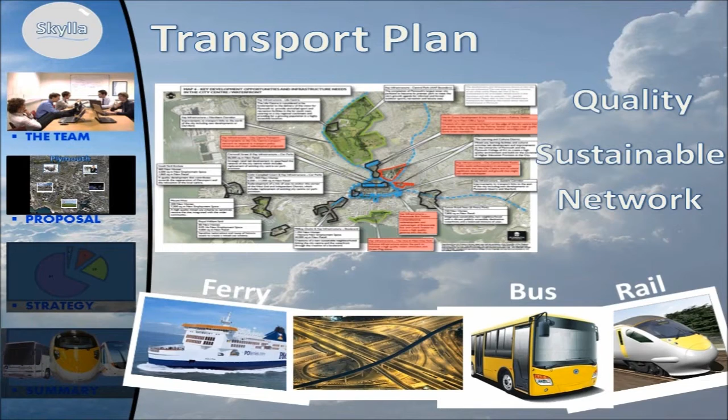The famous naval city of Plymouth, England, has a clear vision to be one of Europe's finest, most vibrant waterfront cities. Plymouth seeks to develop the city as a thriving centre for growth with investment in quality new homes, jobs and infrastructure, with the aim of becoming the regional economic hub of the South West. Plymouth's third local transport plan provides a key framework linking the delivery of a high-quality, sustainable transport network with long-term socio-economic growth for the city, and highlights that improvements to the major gateways of the city, bus, ferry, rail and road, are central to the delivery of the plan's core strategy.

The city railway station marks the end of the Armada Way pedestrian route linking the railway station with the Hoe, and represents a key landing area for tourists and businesses visiting the city, and yet, in its current form, fails to meet the requirements of a modern, attractive city railway station.

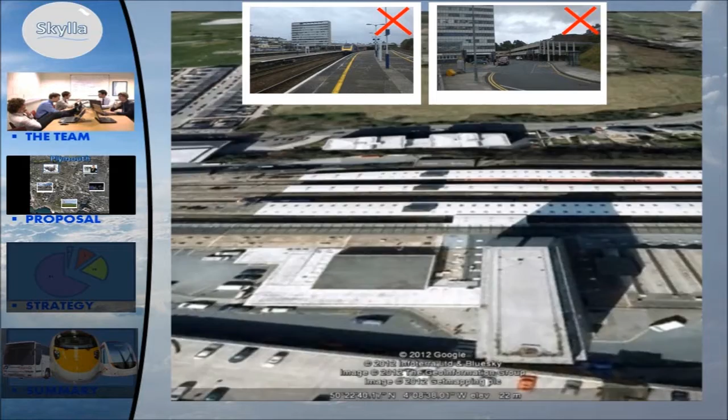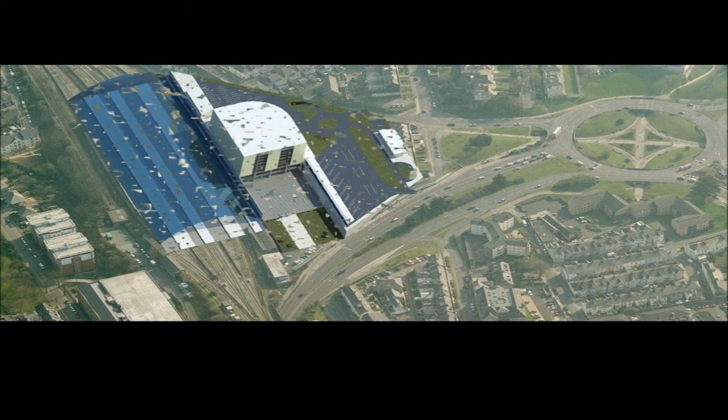In response to these needs for development, SKYLLA has established a truly sustainable solution in the form of a transport hub. The transport hub has sought to fulfil this sustainability agenda through environmental aspects, fulfilling the requirements of BREEAM Excellent standard in line with the Plymouth Climate Change Action Plan, social aspects, delivering growth, raising aspirations, reducing inequality and providing value for communities, and economic aspects, creating business opportunity to kickstart wider growth through inner city regeneration.

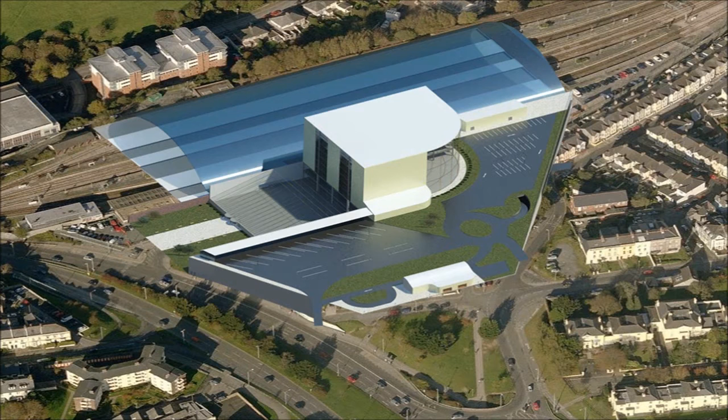To fulfil these desired outcomes, the transport hub will require a complete redevelopment of the current railway station site in order to use the land most effectively. The hub will not only improve the existing services offered, but will also integrate additional modes of transport, including relocating the current Bretonside coach station here and building a new tram system linking the railway station with the city centre and the Hoe foreshore. The change in site level will be utilised to form a top and bottom level.

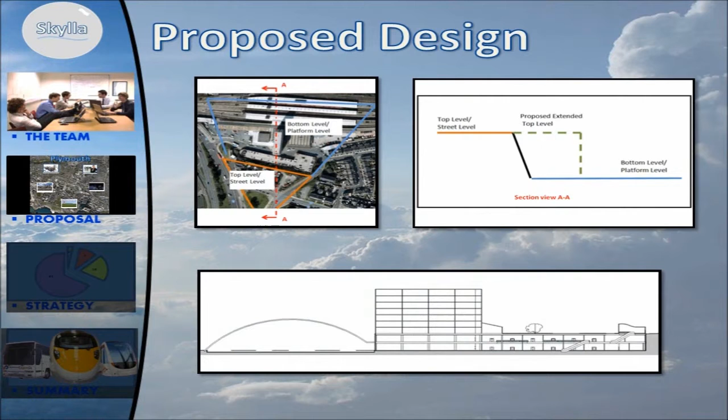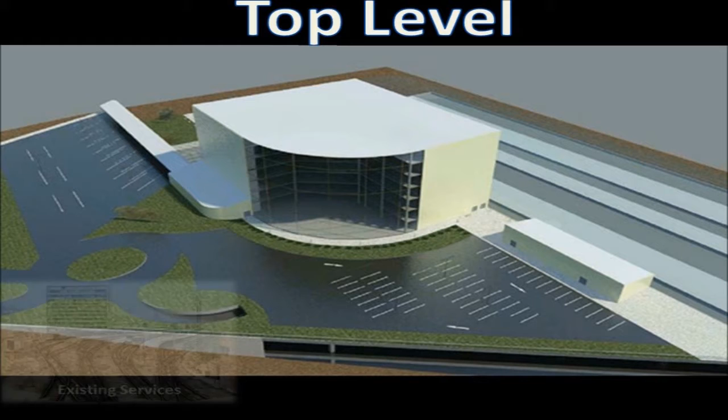The top level will be largely used to incorporate the coach station and a new multi-storey office building. The office building will not only provide space for the current requirements, but will also provide additional rentable space and conference facilities. The taxi rank and car hire will also be located on the top level, in addition to the Welcome Centre, which will mark the end of the Armada Way.

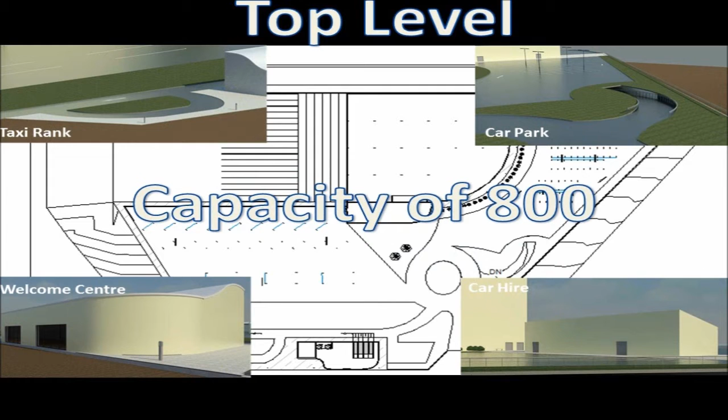A new multi-storey car park will be built beneath this top level and will have a capacity of 800 vehicles, which will not only satisfy the current well-used car parking requirements, but also provide additional capacity for the growth in users expected to the transport hub.

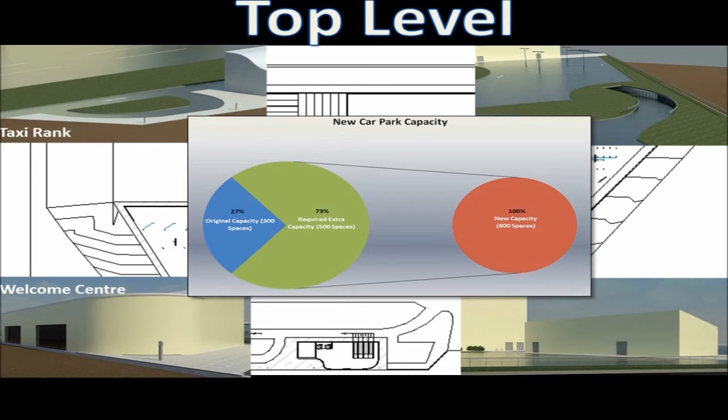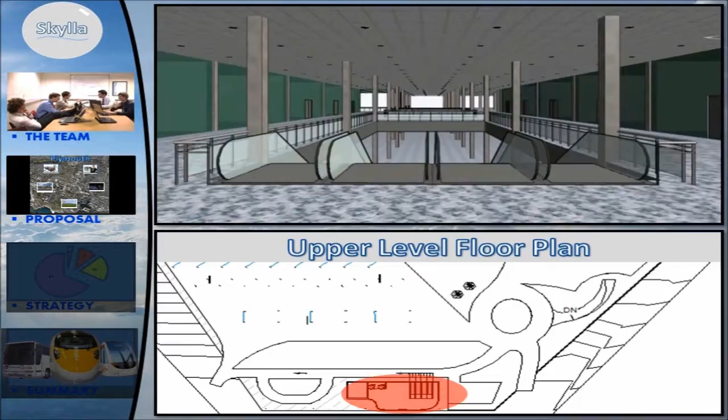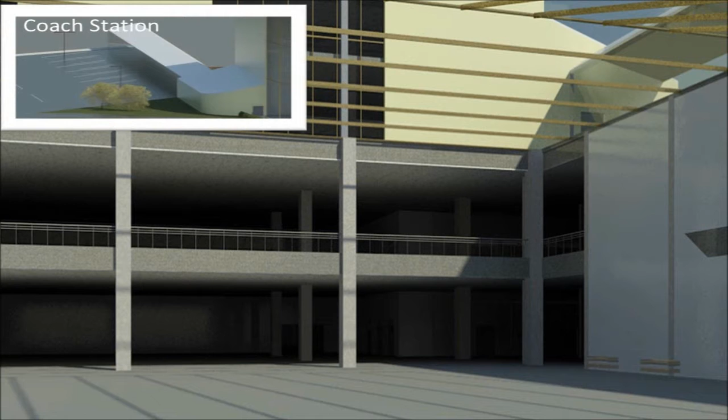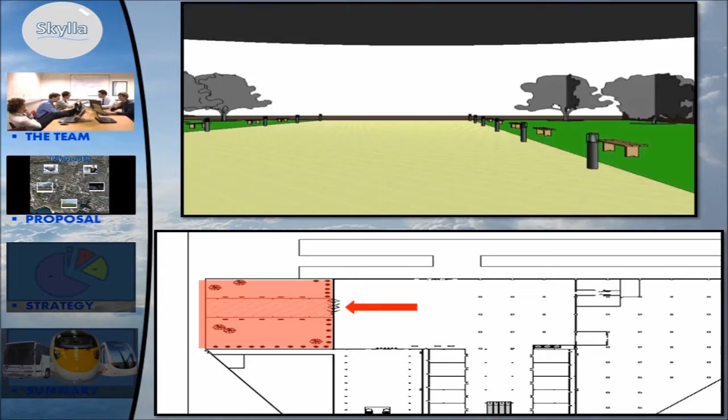From the Welcome Centre, pedestrians will be transported down through to the bottom level, where 2 floors of retail outlets will be situated. Carrying on through the concourse, eateries, restaurants and cafes will provide additional facilities for users of the hub, with the main concourse area integrating access to the coach station, tram station, railway station and car park in an all-encompassing design. A green space will be created outside of the west entrance, which will bring an essence of calm amongst the hustle and bustle of the transport hub setting.

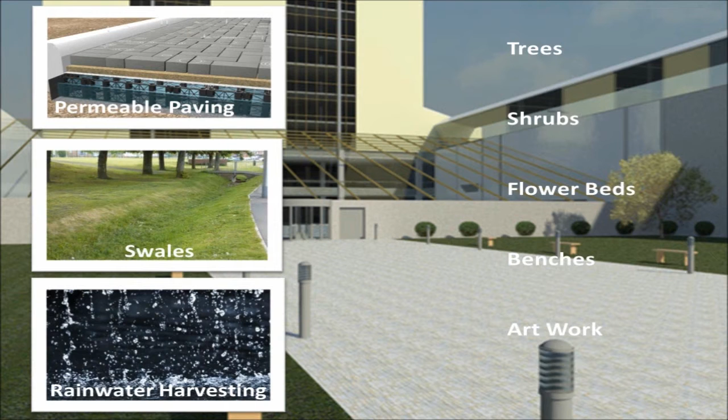This area will comprise trees, shrubs, flower beds, benches and pieces of artwork from the local community. In addition, this area will be utilised for a number of sustainable urban drainage systems in order to decrease the rainfall runoff from the hub to the local drainage network.

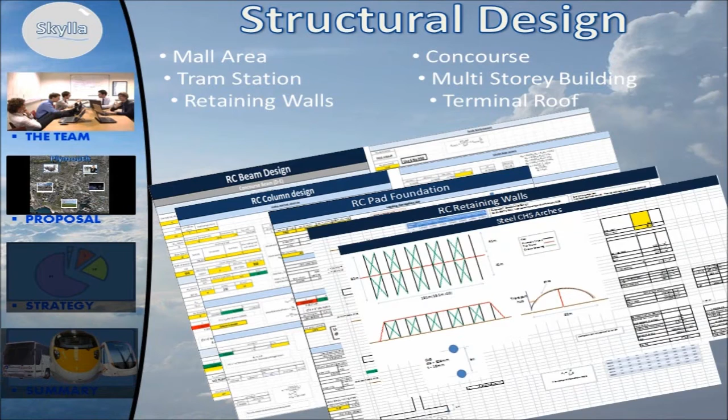The structural design for the mall area and concourse, tram station, multi-storey building, retaining walls and terminal roof have been completed in detail utilising calculation programs developed in-house. An integral part of the structural design was that of the material selection in order to achieve the sustainability criteria.

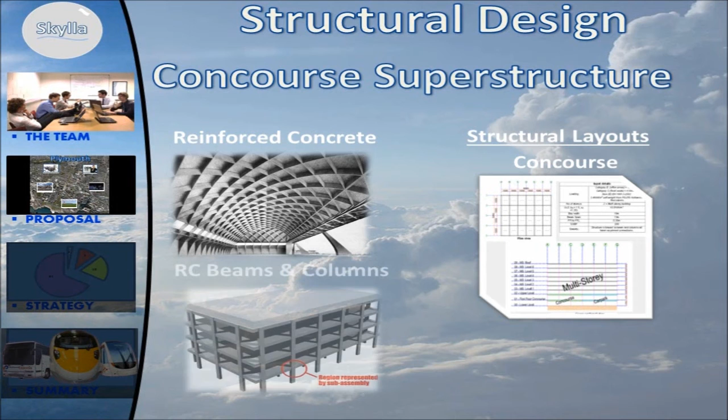Reinforced concrete was selected for the concourse superstructure because of its advantages in thermal mass, noise reduction, fire-resistant properties and sustainability credentials, with the use of recycled aggregate. Steel was chosen for the office building and terminal roof structure because of its weight advantages, flexibility in design and buildability.

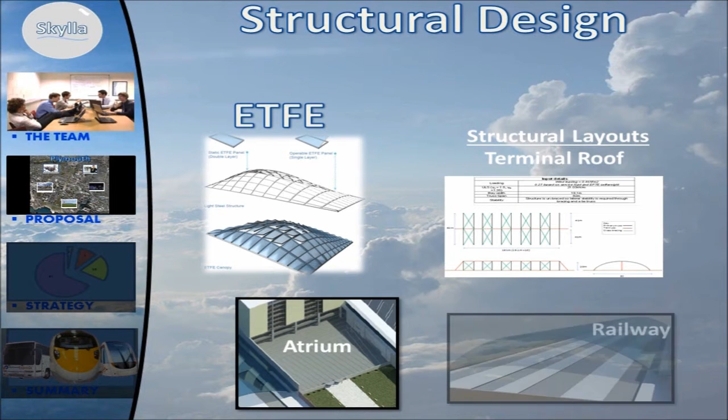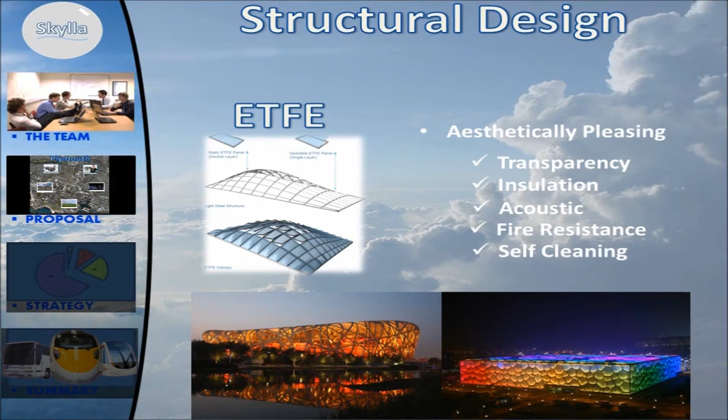Ethylene tetrafluoroethylene, aka ETFE, has been selected as the roofing material over the atrium and railway station areas. As well as bringing an aesthetically pleasing exterior to the building, as highlighted with its use at the Beijing Olympics, ETFE combines great transparency, insulation, acoustic, fire resistance and self-cleaning properties, which make ETFE the sustainable choice for the transport hub.

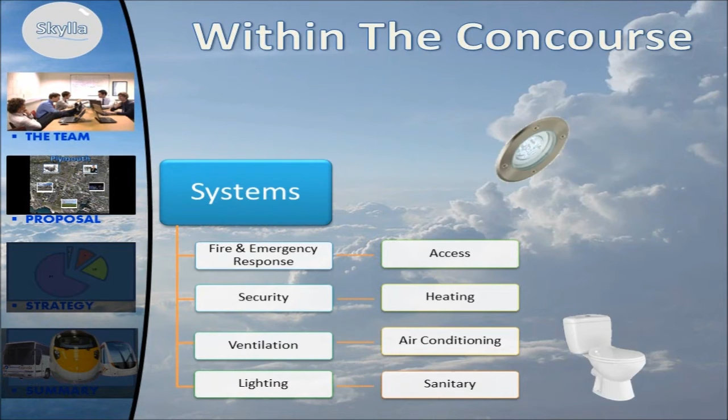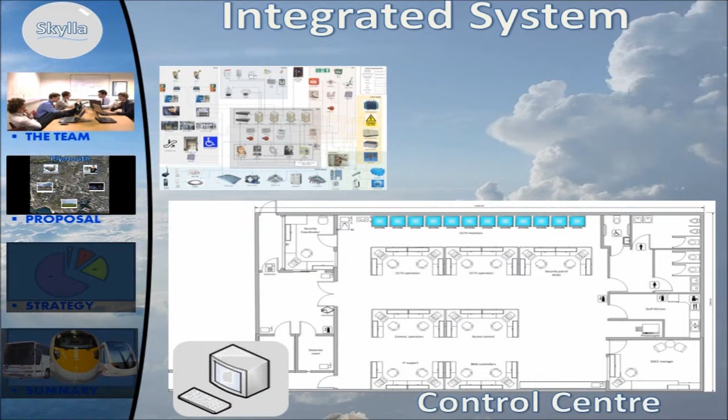Within the concourse, systems for fire and emergency response, access, security, heating, ventilation and air conditioning, lighting and sanitary provisions have all been designed in detail. These systems have been integrated through a centralised security operations and control centre employing a computer-based IP network, which will realise the efficiency savings of these technologies, as well as providing a truly safe, secure and robust building management system.

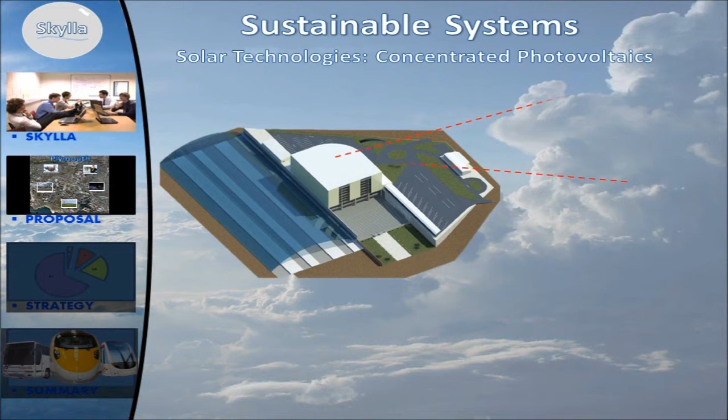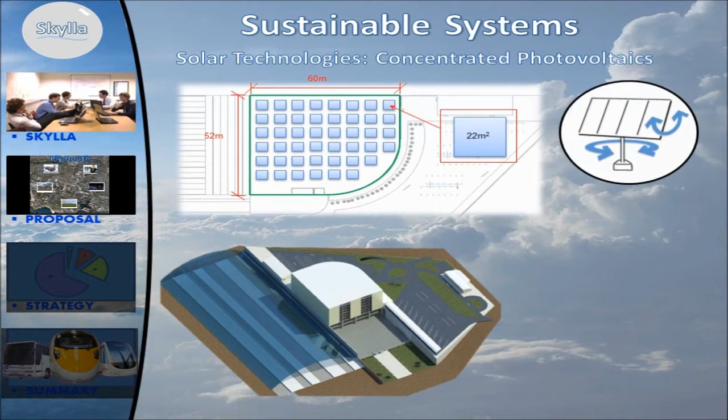External to the concourse, the large office roof will be utilised to capture solar radiation from the sun using an array of CPV solar panels incorporating dual-axis tracking, providing energy for water heating in the hub. The use of solar shading measures, including brise-soleil, vertical and horizontal louvres and reflective coated film, will regulate the effects of solar radiation in the hub and particularly the office building.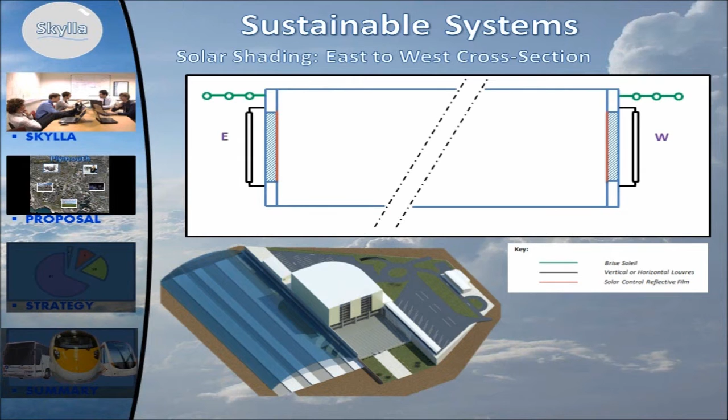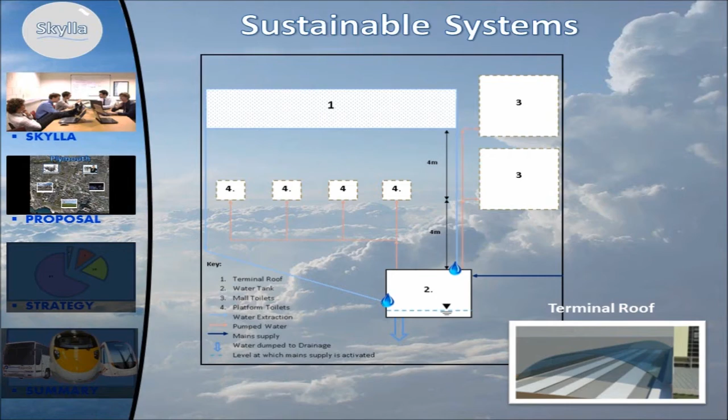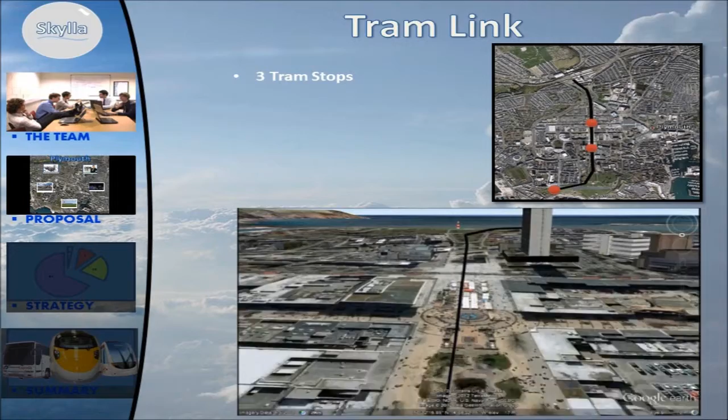The large railway station roof will be utilised also for grey water harvesting, providing a large proportion of the water required in the hub's sanitary facilities. The tram link will lead users through the city underground, with 2 stops in the city centre and the final terminus exiting on the Hoe. This tram route will play a significant role in the underpinning of the project, that is, for the long-term development of the city. For the first time, modes of transport will be linked through a tram network delivering passengers to key city sites.

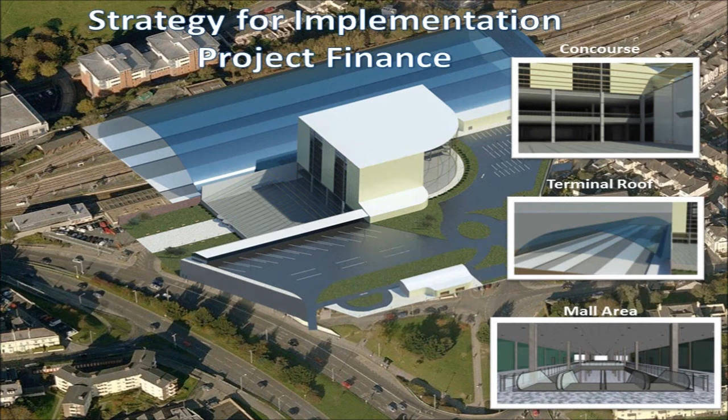The design of the detailed hub elements has been completed in accordance with a number of different standards, including the BREEAM standards associated with attaining an industry recognised certification, and the European and British standards, which are industry recognised design codes of practice. An independent quality assurance team will be employed to ensure the works on site are completed to the correct standards and to guarantee a high standard of quality throughout.

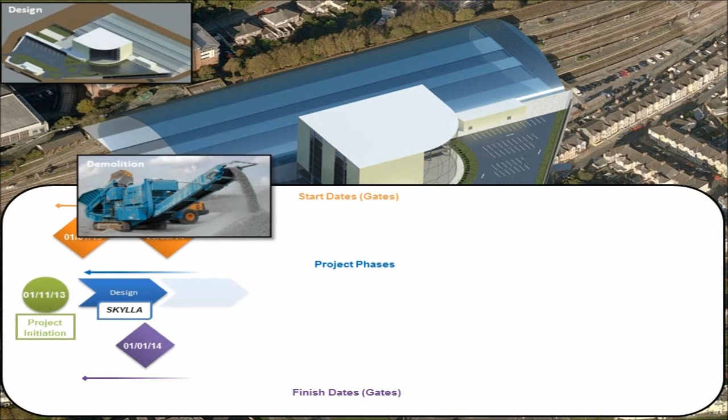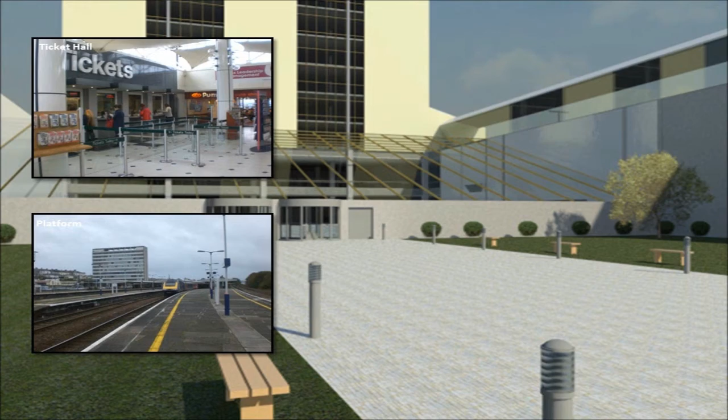The full construction phase of the transport hub will take place over 5 years and will focus on ensuring that the running of the railway station services are not greatly affected. This will primarily focus around the use of the proposed green space for use as a temporary ticket hall and access to the railway platforms. Office workers using the Intercity House will be relocated to rentable office space within the city centre, and provisions for current car park users to use other city car parks with additional park and ride schemes will be put in place.

9 general health and safety principles have been established that should be upheld throughout the implementation of the project. These principles will aid in identifying and implementing precautions which are necessary for controlling risk. A clear risk management hierarchy has been established in order that risks identified in the design process are transferred to the people on the ground and vice versa. Together, these considerations have been collaborated to form a risk register for the project.

The major risks that have been identified by the team surround the areas of stakeholders, logistics and finance, with financial underestimates being one of the highest perceived risks. This risk, however, was reduced to an acceptable level through the use of financial analysis with an investor. The overall project costing over the 50-year life cycle reflected a gross net capital cost of £115 million, with a gross income profit of £6.2 million per annum.

This resulted in the project yielding a net present value gross profit of £3.7 million, with an internal rate of return on gross profit of 12%, and a net present value net profit of £1.5 million, with an internal rate of return on net profit of 11%. The incorporation of mobilisation payments over the first 4 years of the project enables the end-of-year balance to remain at zero throughout, and assists in reducing the interest rate required to service the capital for the duration of the project.

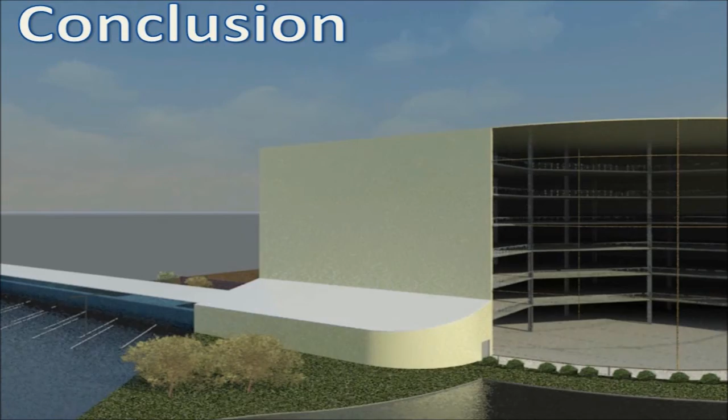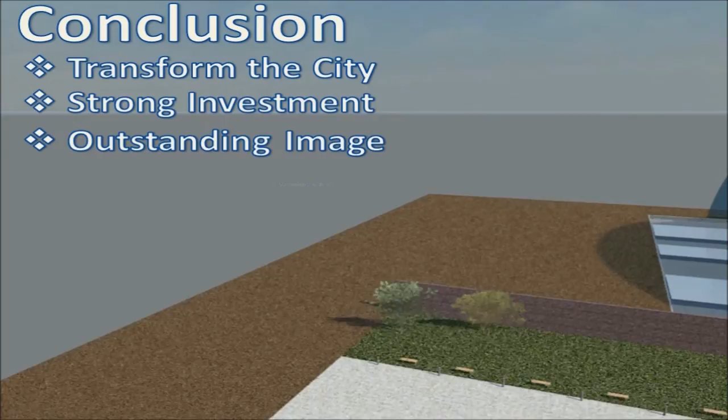So in conclusion, the Plymouth Transport Hub is a large and exciting project which will transform the city into the economic hub it strives to be. SKYLLA believes that strong investment in the project will not only fulfil significant long-term profits, but will also deliver an outstanding image on a truly sustainable project of national significance.